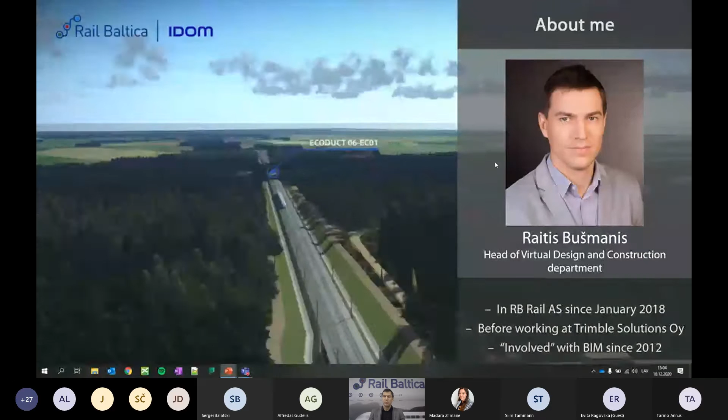A little bit about myself. As mentioned, my name is Raitis. I've been here in RB Rail since January 2018 when I joined the company. Before that I've been working in Trimble Solutions and also generally involved with BIM since 2012.

So today in the agenda is digitalization, then some topics, as I said, not just about building information management, but also about GIS and about asset register, and I'll try to explain those things. Then I will briefly explain how we organize the information delivery, some first acknowledgements of what we have so far, and then a brief summary. And as Liva mentioned, after each of these chapters we will have questions and answers. We will see if you have any questions and try to provide the answers.

So the first topic chapter is digitalization and what we understand by that. These three things, BIM, GIS, and AIM - what are they? Building information management, geographic information system, and asset information management. All of these things have something in common, and this common thing is information.

So actually it's not about 3D models, it's not about some nice pictures or representation of environment. It is also that, but it's more about the information we collect, how we manage it, where we store it, how we utilize it. This word information you will probably hear a lot throughout my presentation, because that is actually the main purpose of all of this what we are doing.

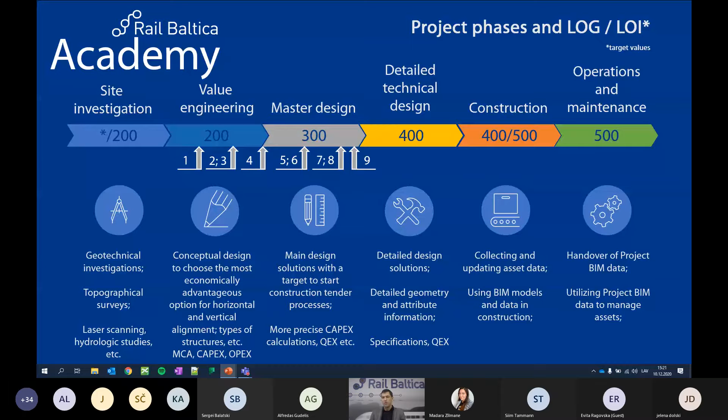Just to understand where we are: we have 9 design sections for the main line, and depending on the schedule and where we are in the project, this is sort of the place where we are now. There are less advanced and more advanced stages. We are in the master design, and we have not yet reached the detailed technical design. That is what is upon us in the next stage, and maybe in a year or so I can report on the findings for those stages.

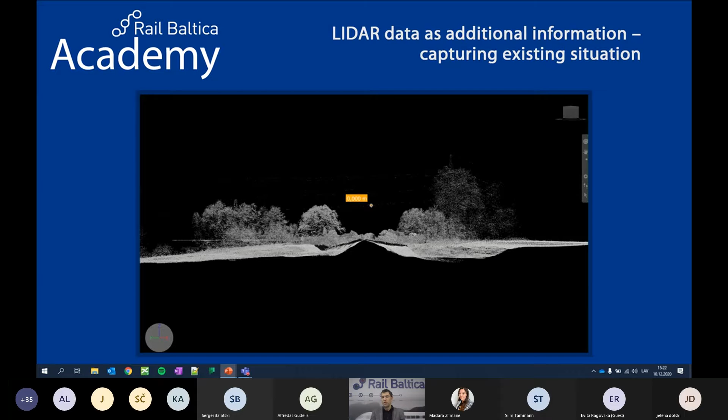So I already mentioned these 3 topics: GIS, BIM, and asset register or asset information management. There's a slight difference between asset register and asset information management, and I'll try to explain that. But just to explain a little bit more in detail what we do with these systems and how we plan to use them. As I mentioned before, everything starts with site investigations, and geotechnical surveys are required, topographical surveys are required, and so on. We are not stepping away from the legislation which is in place, and every designer and everyone who works on the project has to follow the local legislation in every country, and that is mandatory, and that's it.

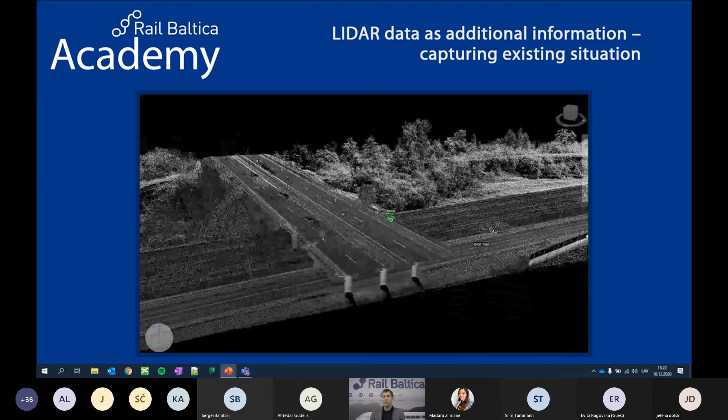Additionally, on top of that, we can have more precise requirements, more precise information that should be gathered during the site investigation stage. Here you see a LIDAR scan of some section where we capture this information so that it can later be used as a reference, as a starting point for how to do the design works.

So this is also mandatory for the designers to do, on top of the requirements which they have to fulfill according to the legislation and so on.

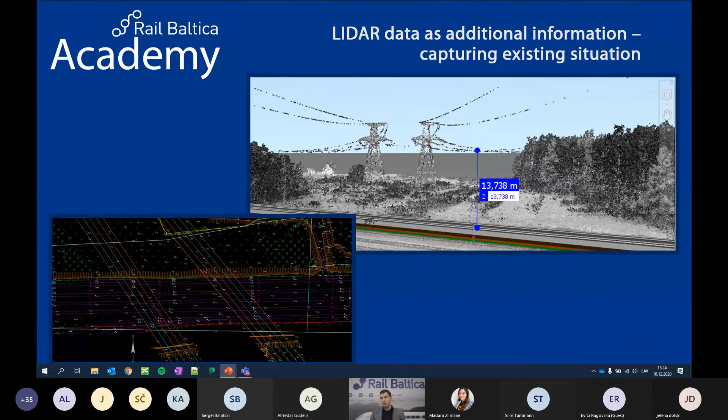So of course this LIDAR data is okay, we collect it, and then what? As I said, this is like a starting point for capturing the existing situation, and in most cases we are on a greenfield project, so we have the luxury of doing that.

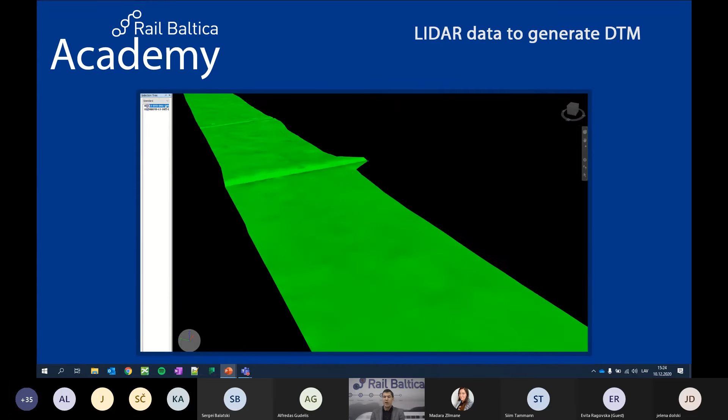So of course the designers use the LIDAR data in order to create a more precise existing situation, to model the existing situation, so that when excavations, cuts and embankments are done, we can have more precise quantities, more precise volumes, thus also trying to achieve more precise results.

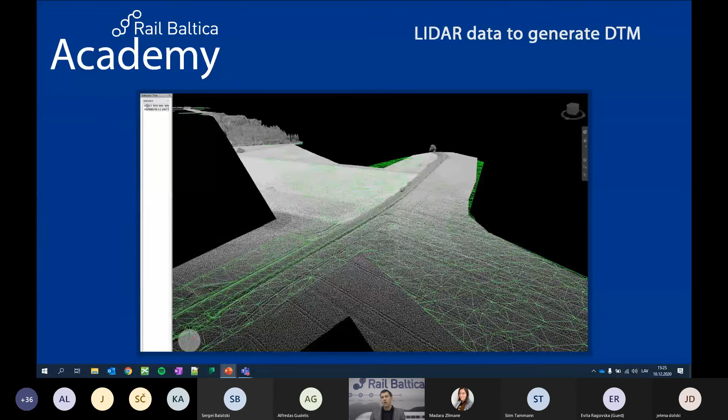And those percentages, which might be small, but if you count it for the whole railway line, for those 870 kilometers, then it sums up to significant amounts. That is why we see the benefit and the value of creating and capturing this existing situation as precisely as possible.

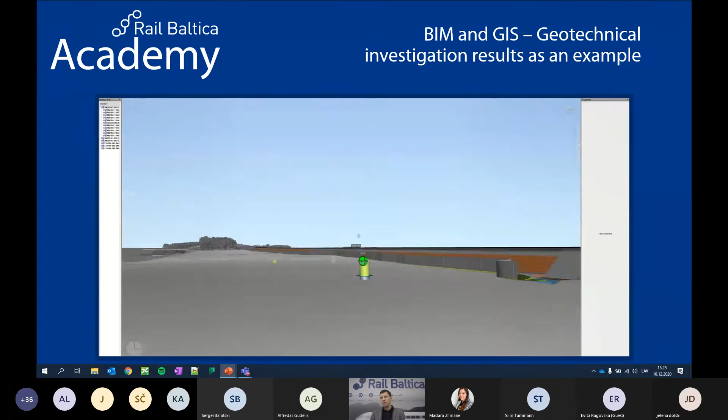Geotechnical information is another thing where we see the benefit of collecting it, because not only for the design and construction process, but also for historical purposes, we plan to store it and it will be available there. So whenever there is a need for doing something additional, we will have this historical information.

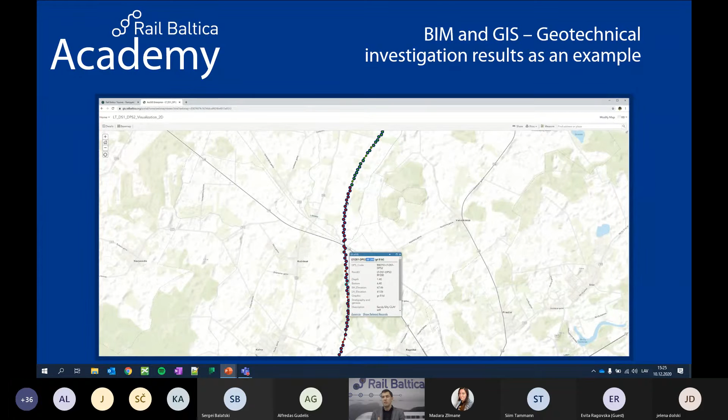This is one of the places where there is an interface between GIS and BIM. So we can have this information interpreted in many different ways. We have the BIM model, we have the GIS information, the GIS platform, and we can let's say make the information in one platform be transferred to the other platform and reuse it.

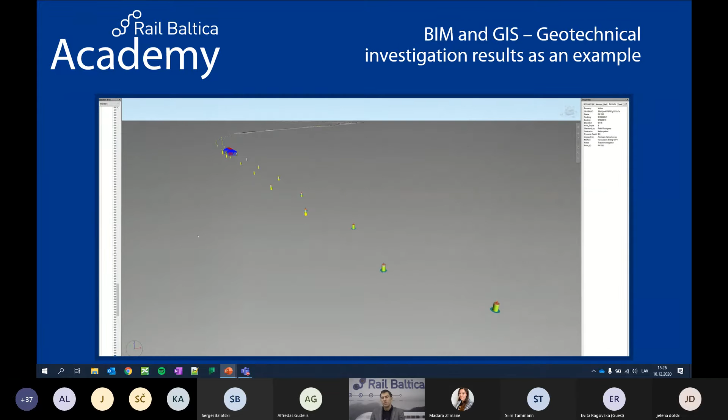This is one of the advantages of using different systems and platforms, because each of them serves a different purpose, but using a web browser or something like that, it's easier to be accessible for other persons. We tend to store it - 2D, 3D information, it doesn't matter actually. So we can implement that information in many different software solutions. As long as we have collected it the right way, as long as we have categorized it, then we can reuse it how and wherever we need and want.

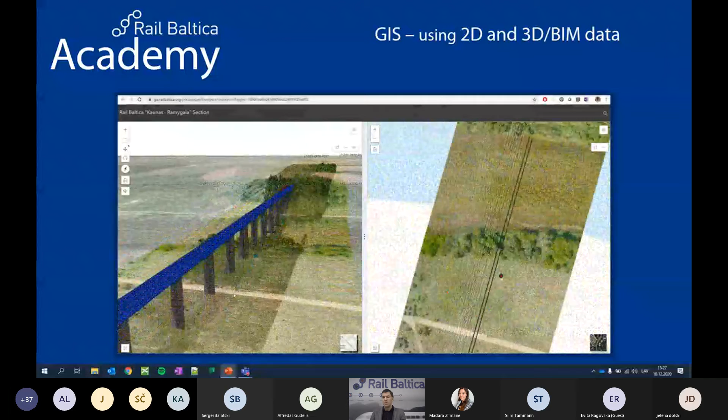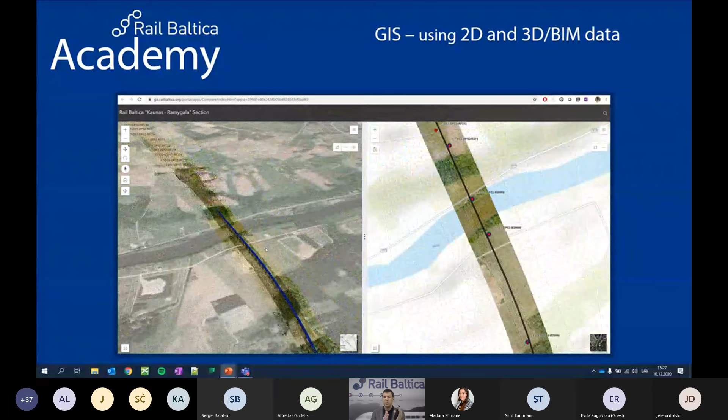But nowadays GIS also has the nice capability of representing 3D information and BIM information. So what you see here is not a specially made model for GIS - it's the same IFC format model which is imported into the GIS, and we can even display side by side GIS 3D or BIM model with typical 2D information, sort of geo-referenced together.

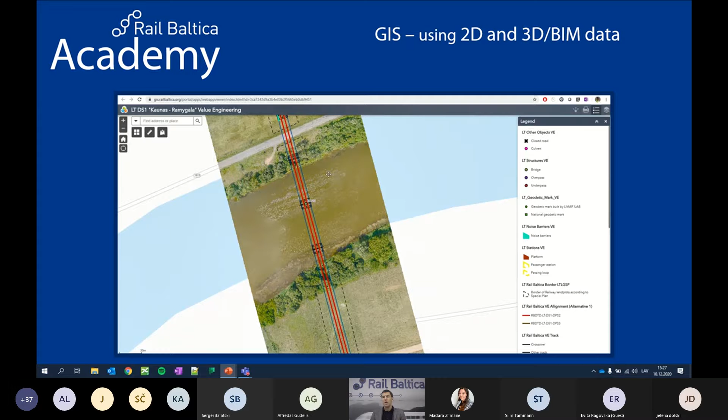So again, another use case of how to reuse this information, how to make the same information work for many different purposes - this is what we try to achieve. Another use case is visualizations. They are like pretty pictures, maybe made for the general public and not so much for the engineers, but we reuse the same information, and by we here, it is our designers' task to do it.

And if we have the model and if it is precise, so we have the LIDAR, we have the design solution, we have even topography and everything.

From this information, the visualization can be created. You see that the noise wall location is there, the overpass is there, and of course there are elements added within the visualization just for visualization purposes, but the basis is the model, and all of this information which we have collected throughout the stage of the design can be reused.

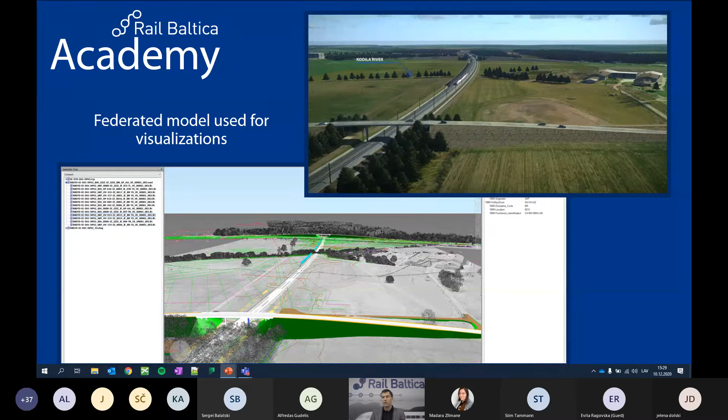Here's another example, more or less the same shot from a visualization and from the BIM model. So we have the LIDAR on the back serving as the existing situation. We can easily understand even the houses or any other objects which are in the field, and from that create this visualization using this BIM information as a basis, and from there we can proceed and create more environment-realistic visualizations, because the visualization is important for the general public.

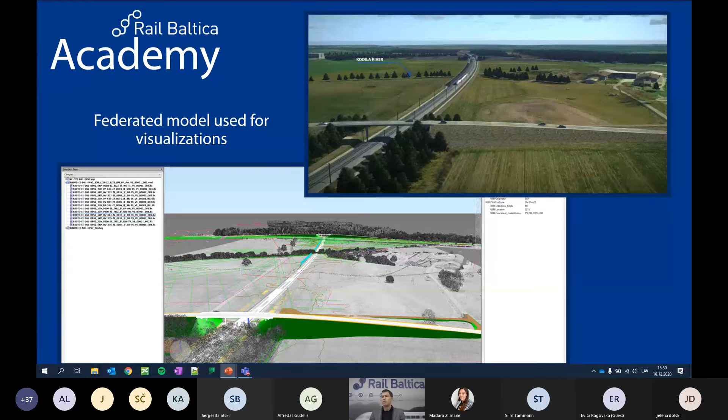They need to, if there's a person living in this house, they want to understand how this will affect their life and their work, and maybe the technical design solutions is not the best way to communicate that. If he sees the presentation in the visualization material, then it's more clear for them how this will affect their daily life and work.

Talking about the BIM models a little bit more, and the information I told you about - according to our requirements, all the information which is stored and embedded within the model gradually grows. So here we have one example from value engineering. It's a rough model, so it has some information.

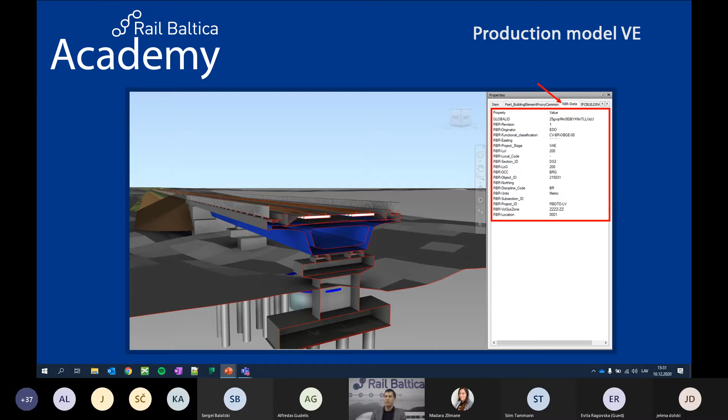As you see here, it contains some basic information for which design section it is, what is the number or ID of the certain element - in this case it's a bridge cut - what kind of functional classification this element has, and so on. That information is included from the early stages of the project, so that later we can still reflect on that and follow what is happening and how it is happening.

But as we advance through the different stages - and this is now a master design model - you see that the graphical information grows and the non-graphical information grows. So we get more and more information about the same element, the same bridge. We already have some material classifications, element classifications, concrete classes, and so on. All of this information is gradually being collected and implemented as we move through the process.

This is, of course, a task for our designers to follow. We, as a client, have to ensure this information is implemented according to our requirements, so that when we collect this information together from many different designers and different companies, it would match, and we would be able to reuse the same information later in different stages of the project. So information management is a very crucial and important step.

This is not about the 3D models - this is about managing the information. The 3D just comes as a complementary aspect of data management, of information management. And of course 3D is good for understanding the solution, for understanding the environment, for better capturing the essence of one or the other solution, because maybe at one time a certain cut or cross section does not represent every detail which needs to be seen. So those can be created at different places upon demand, and so on.

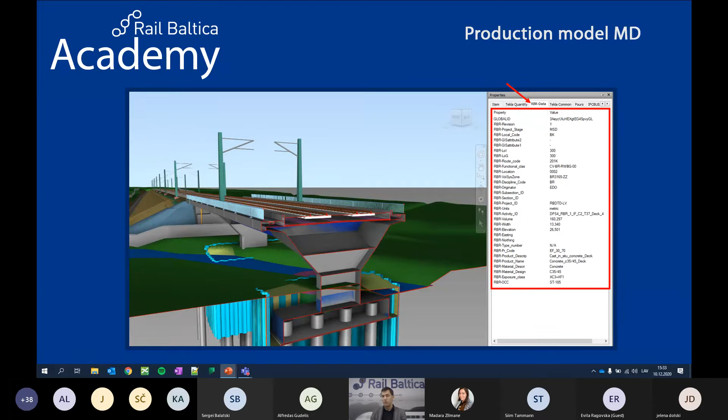So this 3D comes with a benefit, but from asset management and future perspective, we see more benefit in the information than in the actual 3D information which comes together with that. Another example from another model, a bridge model, and I put this slide here just to tell you that we are not the ones who say we will go without drawings.

No, the drawings are there. The drawings are still in all of the 3 countries where we implement. They are still a mandatory use case. They need to be there, and we are not ruling them out. We are not saying that we are going drawing-less or something like that.

No, but what we do ask, and what is our requirement, is that the drawings would be extracted from the model. So the model comes first, and then comes the drawing production. This is something we need to follow up on, and we have to monitor if that is actually happening - it's not a secret, there are cases where this does not happen that way.

It happens the vice versa. We try to catch those, we try to teach, we try to work together with the designers so that it would not happen. We want the model to be the basis, which contains all the information, and then if you need that information onto the drawing, you can extract that from the model. This is our approach, how we are trying to approach this.

There are a lot of challenges, and this looks nice and easy on the pictures and so on, but believe me, there's a hard work behind that. There are discussions, explanations, many different negotiations behind all of this, so that we would be able to get to that level where we want to be. And I can tell you that we are not yet at the level where we want to be.

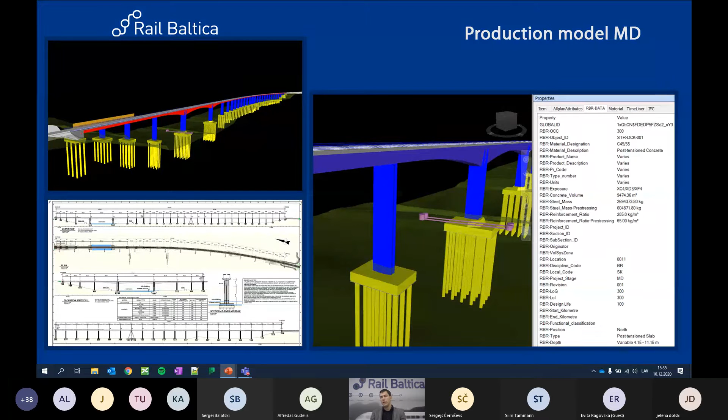One reason is that we still have a lot of design work ahead of us, and the other reason is that also this is a learning curve for everyone, and I will reflect that later into my presentation.

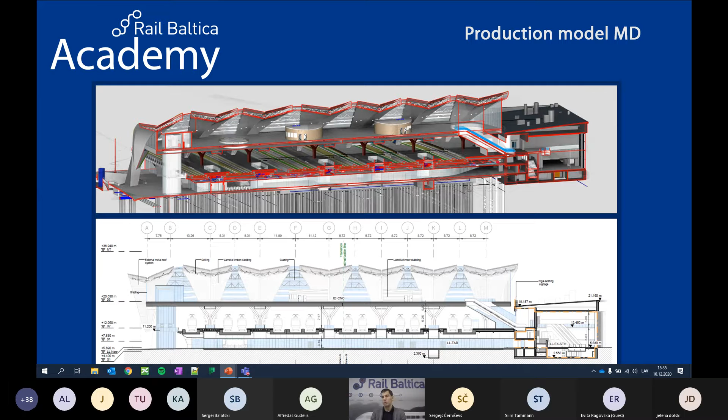This is just another example with the drawing and the model, and I think it's basic knowledge and basic understanding that the drawing shall come from the model. So the model comes first, you model everything, and then the drawing is created out of that. And if there are some changes in the design, those are done firstly into the model, and then they are reflected automatically, less automatically - that depends from software to software - but they are reflected onto the drawing as well. So the main driver and the main information, where it's stored, it should be the model and the database around that.

To help a little bit, maybe our designers, what we did, we also developed these architectural landscaping and visual identity design guidelines. They are part of official design guidelines. So we have a book of rules how the designer should do the design, and what kind of standards they shall follow, and so on.

We move on. Of course, we cannot do this for all design elements or all stations, like those big international stations. There the story is of course a little bit different, because all of them are unique, and the designer has to come with their own proposals, designs, and so on. But there are some elements which we can tell them how this design should proceed.

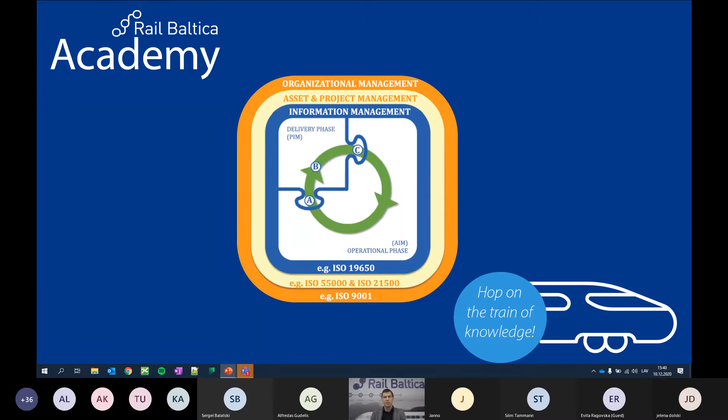I know this is not an ordinary situation, because usually there should be an infrastructure manager in place which comes and tells us, okay, this is our process, this is what we need it that way. Unfortunately, we are not in that position, so we have to work a little bit differently, and what we need to do is come up with solutions how to get where we want to get. And this is the situation we work with, these are the circumstances we work with, and we shall continue to do our work.

In order to collect the information, which I have mentioned before, and to structure that information, I told in the beginning of the presentation that we need some kind of software solution to supplement that. So we have a solution in place where we set up a sort of locked environment between us, the client, and the person or legal entity or designer who is doing the design work in this case. So we create this link, this one project for us and for them, and they deliver the information to us using this system.

The benefit of doing that is that all of this information, when it's delivered, how it's delivered, has a sort of paper audit trail, and we see how the information is delivered. Also the benefit is that when this information is delivered, both parties see it. The difference is that on the client side, we collect this information, we store this information. The other party can access, they can see this information, but none of the parties can actually edit or modify that particular deliverable.

That is the rule of thumb here: whatever information is delivered to the client in that deliverables package, it cannot be changed. It can be amended, a new version can be submitted, a revision can be done, and so on. But that particular package, you can't say, okay, I delivered this wrong file, so I will remove that file and place another file instead. No, it doesn't work that way. Whatever is delivered, it stays there.

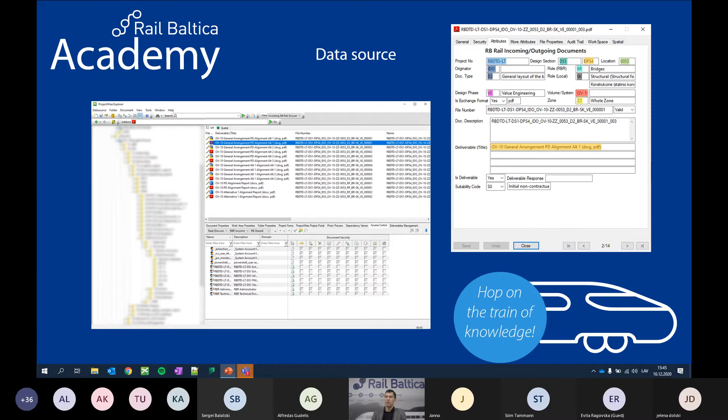So that we are able to identify the deliverables, categorize them, and find them. This is about data management and how we manage the data coming from the designer, how we structure it, how we put it there. But the best thing, and this is what we are currently starting to do - we're in baby steps here.

This is the other side of the solution, that we can actually use the information we have received within the system, map it how we want, and visualize that information. It's not transferring information from one solution to another. It's what we are now trying to do and investigate, to reuse the same file or model to capture the information, so we don't have to copy paste it to some other place. So we work in one system. Now it's not all shiny and great.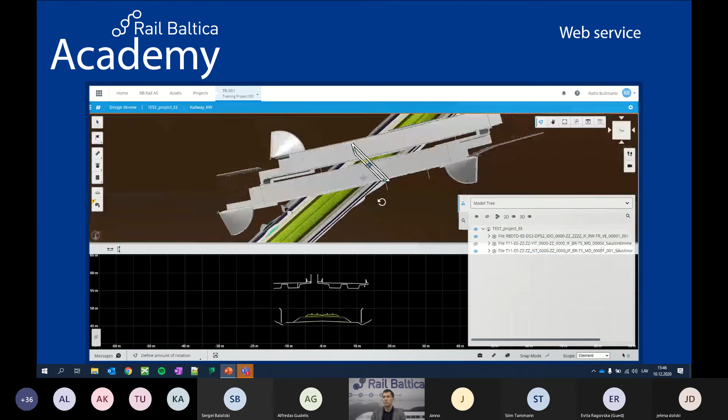There are still some things that we need to improve and work on. I'm not saying there is only one solution for this. Of course, we need to work on other solutions too - there has to be another solution. There are so many things that need to be done, and at the moment, as I said in the beginning, there is no one software solution that can do everything. So we try to explore and understand what is the best approach going forward.

As you can see here, all of the information which I showed previously in the screenshots, also about the model, about the classes and everything - you have that available at your disposal. You can search for it, color code it, and so on, so you can manage that information, and there are use cases for that.

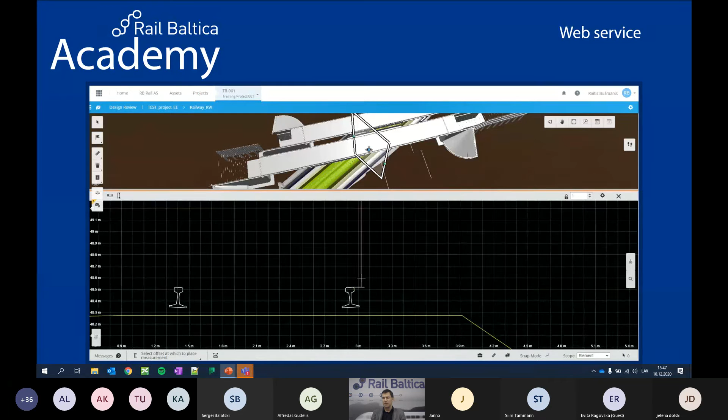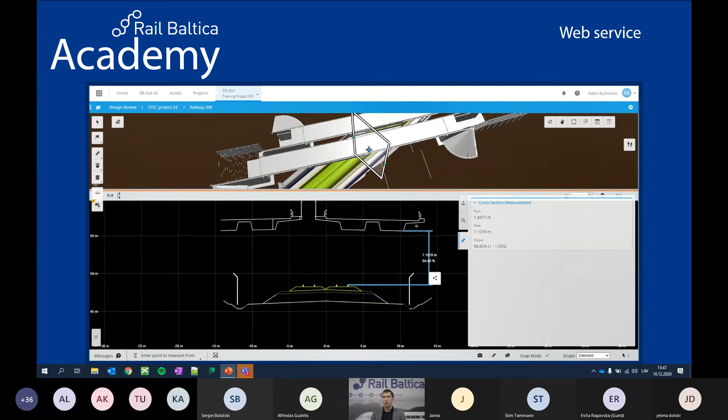There are different solutions which can be used for different reasons, but this is one of the advantages. What I wanted to show is that we can reuse the same information, the same solution, and we don't have to jump between different solutions, different software, and so on. So this is the main purpose of what I wanted to tell with this, and I see this as a benefit in that we do not copy paste to somewhere different. So we have one single...

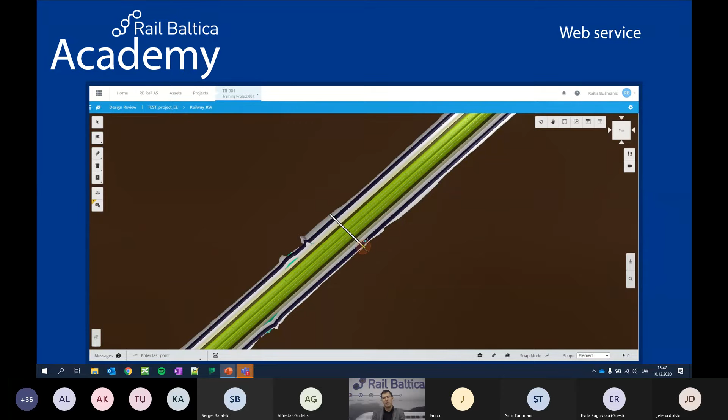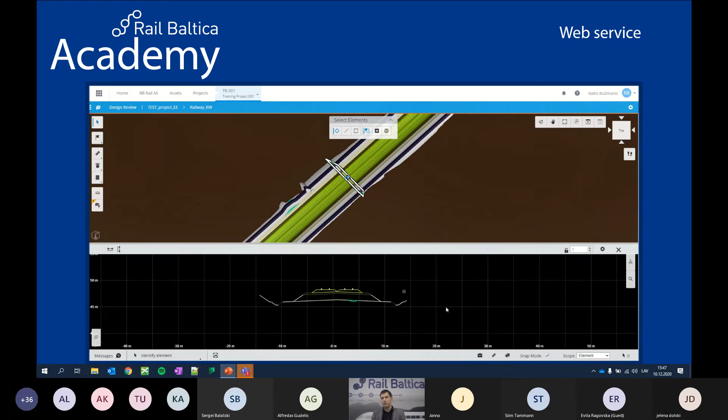I know it's cliche, but we have one single source of truth where this information is stored, and that is the target. I'm not saying we are fully there - there's still a long way to go, but that is what we want to build, and this is what we are planning to do. But in order to get that information, it's not straightforward. We only see the end result, the nice shiny picture and the nice model at the end, but of course there's a lot of work behind the scenes in order to get there.

This is from one of our designers who described their workflow, how to get from the discipline model to this federated model where everything comes together with this data-rich information. There are different software solutions, different approaches, and according to our requirements, we are not requiring the designer to use a specific software vendor or tool. What we require is that at the end they deliver the information according to our requirements, and whatever tool they use and see fit for that reason, fine - they can use it as long as they can deliver the end result.

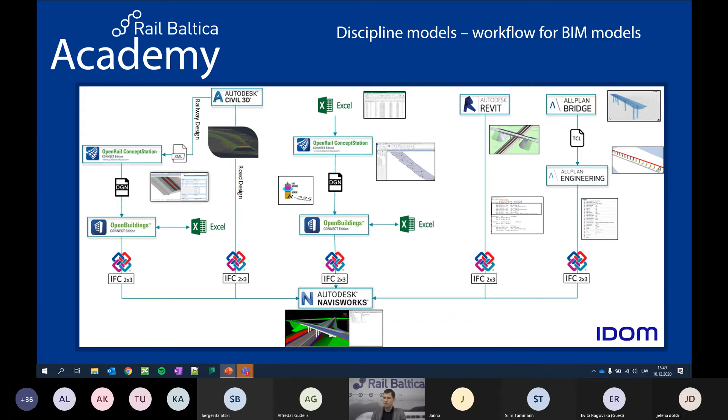So that is the aim and that is the target. Of course, every designer, every engineer has their weapon of choice, how they see the best fit and how they can deliver this information. There are many different software solutions out there - I think the market is getting bigger and bigger, and there are more and more different solutions that can be used. If they can prove that they can deliver this information to us in a certain way, they are free to use it.

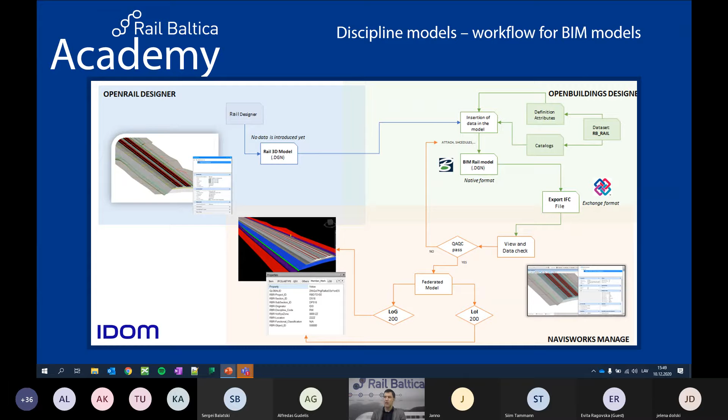Another example of a workflow, how to get from model to BIM model. So there are workflows - there is work behind the scenes, because one solution is better for one thing, the other solution is better for the other thing. But the end result is what we want to achieve, what we want to get there. And this is the sort of end result, which I already showed in the previous screenshots, that we have a model and we have a data-rich model. So that is the reason, and all of these elements and everything.

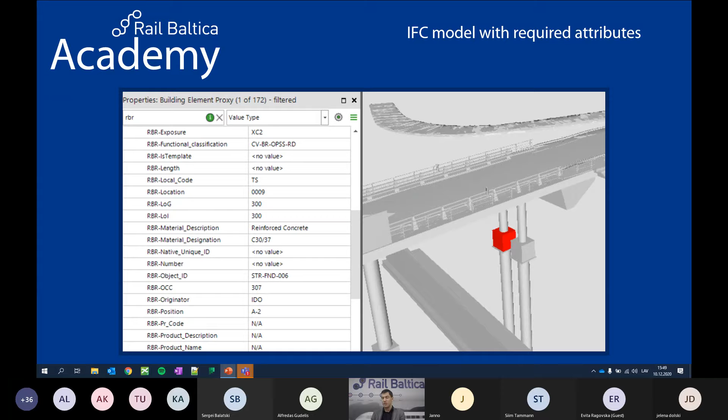This is the information we get so that we can have it in the database and reuse it later. This is one example from a GIS solution where we are starting to build the database for the asset register. This is asset information management - we register all the information we have and put it together in one place so the database can be reused later.

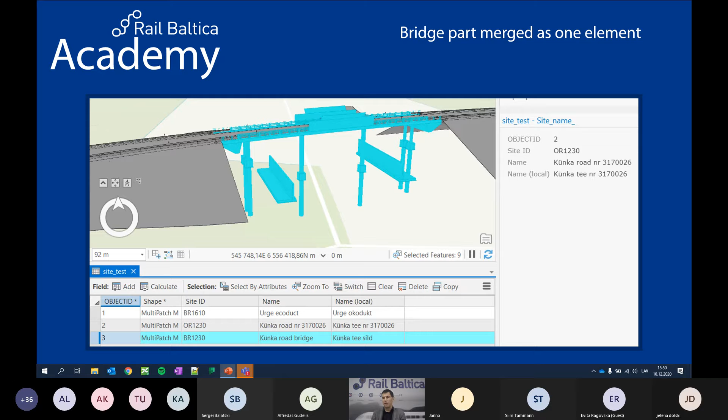It can be stored like in the previous example, with bigger primary assets or a primary level of information, like a bridge or an overpass. Then there's another level for each and every element, so we can break it down to the level that we need. This is still work in progress.

There are still some issues we need to solve, and challenges we face with this. But this is the approach we are taking at the moment, and we want to push it forward to get to this result. As the technology is advancing - maybe 5 or 10 years ago especially - it would not have been possible to get this kind of information usable across different platforms.

But now, it's still not 100% shiny and polished, but the capabilities are starting to appear, and this is what we are trying to take advantage of, so that in 2, 3, or 5 more years it will be perfect, and this will be everyday life for any infrastructure manager or similar role. So that's what we are trying to do.

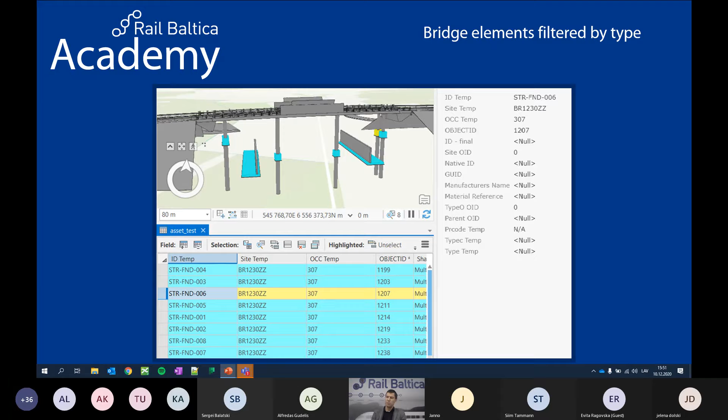We are trying to push the boundaries here, to explore these options and how to get there with what we want. So this was the next part.

Let's proceed. So part 3 is the acknowledgements, what we can already tell, what we have seen and learned from. This will be, I'd say, a rather short chapter, and I just want to reflect on the things we've done so far and what we've seen, and there are some eight acknowledgements here.

And if there are questions, they need to be raised as soon as possible, so that in later stages of the project we would not run into issues. I can tell you from experience that happens, and it's almost impossible from the first time to define everything and have everything set clear. But we learn from that experience, and we try to do our best as the design contracts go, as the construction contracts start to go - we try to learn from previous experiences.

We have covered how the transport demand and benefits of a mega project were translated into the scope of the Rail Baltica project; Rail Baltica's approach to putting in place world-class railway systems to guarantee safety, speed, and sustainability of the new line; Rail Baltica's approach to railway energy system deployment to enhance future passenger mobility and freight flow with nearly zero CO2 emissions and minimizing air pollution generated by the transportation sector; and the shortest one, Rail Baltica's digital data strategy.